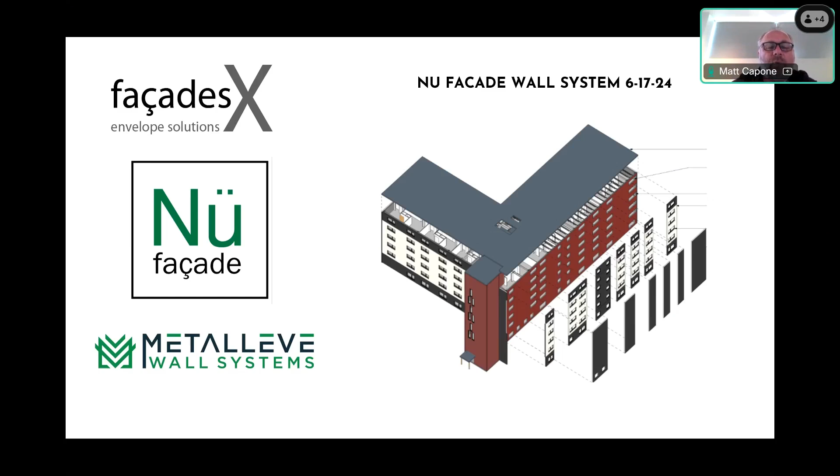My name is Matt Capone, the owner of facadesX Envelope Solutions. Quick presentation today on our Nü facade wall panel system. We're looking to explore the world of renovations and overclad, and in partnership with Metalleve Wall Systems, we've created this kit of parts.

facadesX is my company. And at its heart, we are manufacturers representatives for cladding and wall system manufacturers from around the world. Cladding, fiber cement, windows, wall systems, air vapor barriers, and all kinds of components that really go into the wall. And it's this kit of parts that really helped us create the new facade.

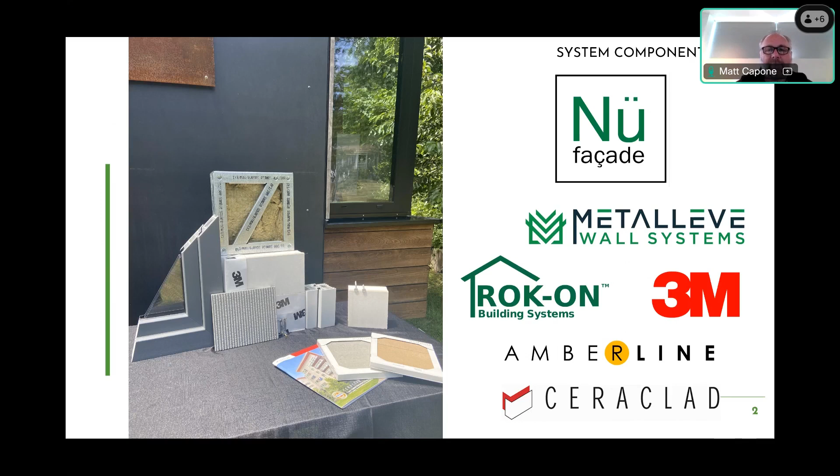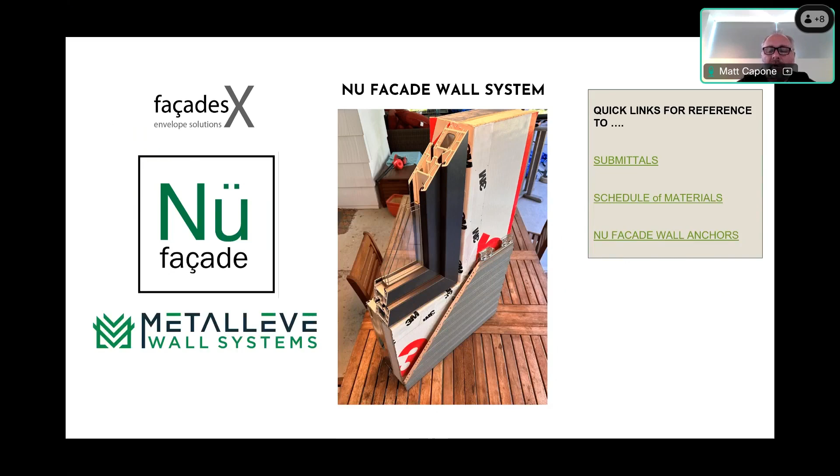So we look at each of the materials as an element, and we create a compound, which is the Nü facade wall panel. So everything is existing as a separate system or product, but then comes together in a panel. And the backbone for that is our partner called Metalleve Wall Systems. Here you see a small cutaway section of a mock-up where we're integrating light gauge metal framing, structural insulated sheathing, cladding, and windows to create panels that can be overclad on top of existing facades.

So here we'll dig into the base, the backbone, the exoskeleton, if you will, of the panel system. Metalleve Wall Systems, we are a manufacturer of steel stud framed walls and floors and trusses, but basically we're buying raw materials. We're buying light gauge metal frame coils, commodity basis, and our system relies on a backbone called FrameCAD.

FrameCAD actually creates these machines and the software for architectural design, for structural design, and all detailing. So all of our modeling is fed into a Revit-based platform that FrameCAD offers, and then we design, we engineer, and then we output to these machines to actually print or create individual pieces.

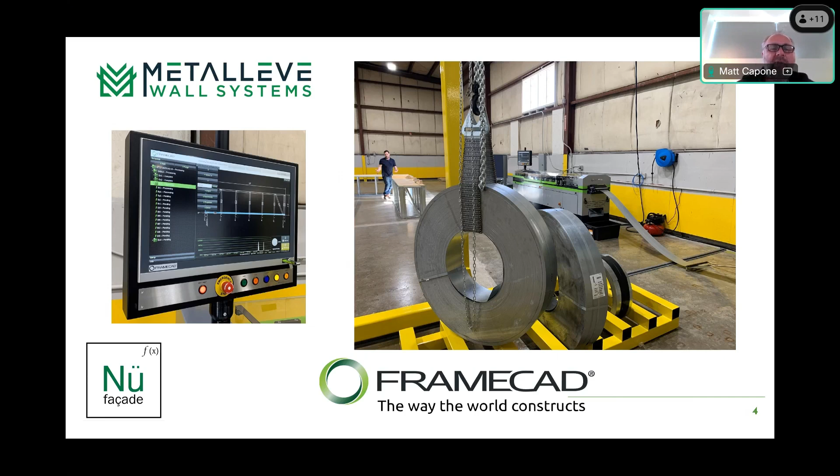So here on the left, you can see the machine: the coil comes in, feeds into the machine, and the output of the machine is C-shaped stud pieces that are already cut, drilled, punched, labeled. They have service holes, they're pre-drilled, they're completely ready for an IKEA type assembly. Every piece of panel is exact and perfect.

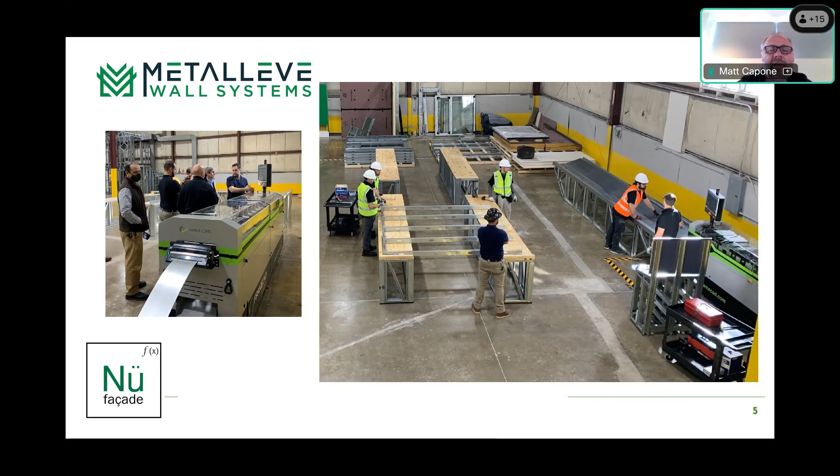So we actually fabricate wall panels that are 3 and 5/8 metal studs and 6-inch in various gauges from 16 gauge all the way up to 20 and 22 gauge. The various gauges are really about structural performance, integrity, ability to be load bearing, and capacity to hold

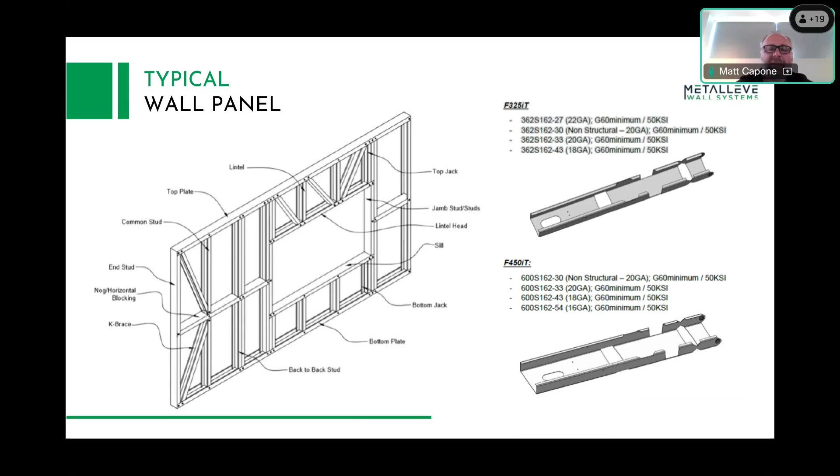themselves in place. A very important element of the FrameCAD backbone that we rely on is that it is an ICC tested assembly. And the ICC is the ultimate testing protocol for performance of materials in the building market, so having this behind us is really important. Also, our independent factory at Metalleve is part of the audit process tied to the prefabrication capabilities that you get with the FrameCAD system. So it's very important that we have that support and protection.

So once we have that steel stud backbone, we're adding some important layers. Here we're seeing pallets of structural insulated sheathing. This is a system called ROK-ON that we utilize.

And this product will screw fasten directly to the steel studs. This replaces the DensGlass for any non-combustible type fire-rated construction, provides an insulation layer, but is also the vehicle that the cladding attaches to. So when we're putting cladding on these walls, we don't need to attach the cladding back to the studs.

The front face of these panels, which are made of magnesium oxide board, are very fire resistant, but they're also very strong for screw pull out. So if you see in the front of this image, you can see a couple screws on the side of the panels. Those are pre-set up for window returns.

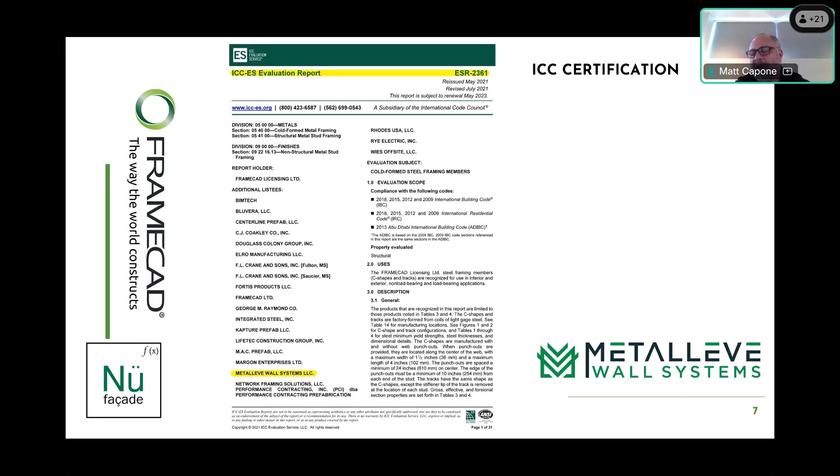So essentially we're creating the steel studs from a shop drawing, a precision fabrication drawing. That same drawing is going to the ROK-ON factory, and they're pre-cutting and pre-manufacturing the sheets that are going to be applied to our panels. And so if we start with a steel stud wall, we then have to overlay this essentially to match or as per the specs require.

So Metalleve is a factory. We are a fabricator of the raw materials to be used on site. And so we're actually serving the Northeast out of our factory in Harvard, Mass. So we have capabilities and logistics for shipping.

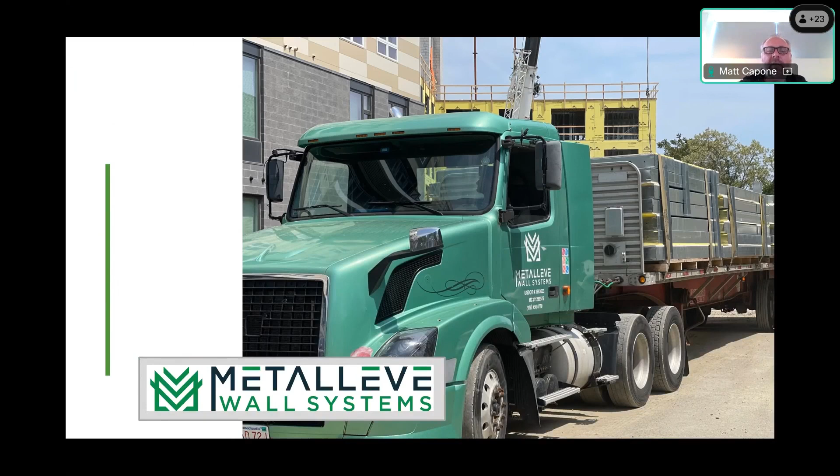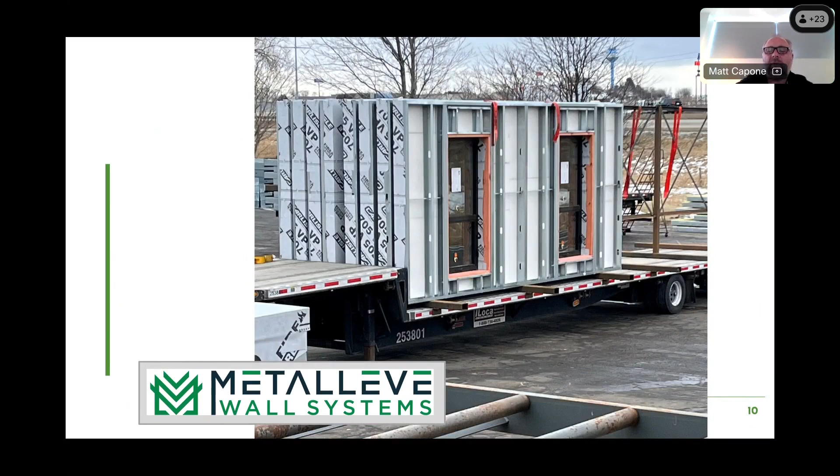In this project, this is a 7-story load-bearing project with steel studs and DensGlass pre-applied. This is a project that is already with windows and having the sheathing and the air vapor barrier applied. And so this is where we're heading for our crop of retrofits that we're going to detail coming up here. But the process here is really pretty straightforward to create these panels and to create them to fit on a specific project.

So I want to highlight this project. This is a current job up in Salem, Massachusetts. This is kind of your typical affordable housing project built mid-60s. This one is 6 stories, 7 stories on the other side. So a lot of these brick housing projects, they're all rented, they're occupied. Tenants must stay in them.

But you think about the number of buildings like this from 3 to 5 to 7 stories around the Northeast and around the country that really need not only some way of repositioning or improving the aesthetic, but also to essentially encapsulate and create a new energy performing, high performance skin that is being put over.

And so the first step that we do on site is actually to do a 3D scan to understand the layout and the panel configurations. How much does the building lean? What can we learn about that existing structure that might be unique or create difficulties? So we start from this and an architect's drawings. Maybe we have the existing drawings to create a panel layout. What is efficient? What's effective?

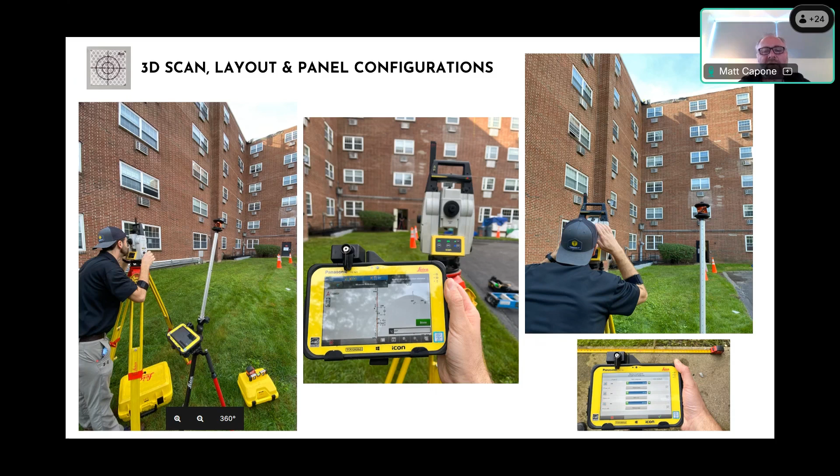And we have to think about items like logistics for hoisting and rigging and building access. Is a bigger panel better? Is a smaller panel better? Lots of things play into this.

One of the requirements of this project was that they're going to run all of the new fresh air and new condensate lines in this service cavity. So these will be field applied and installed before our panels come. So the task was not only to create a panel, but the task was to create an offset in that cavity of 6 inches. So in the blue layer, you can actually see those are the steel studs, and then we have the structural sheathing and the cladding.

But through the process of playing with dimensions, window sizes, what is the exact, let's say, recipe that's right for this building, right for every building, lining up the windows. There's a lot in that process that really is very important to understand and basically to nail as much as possible before we arrive on site.

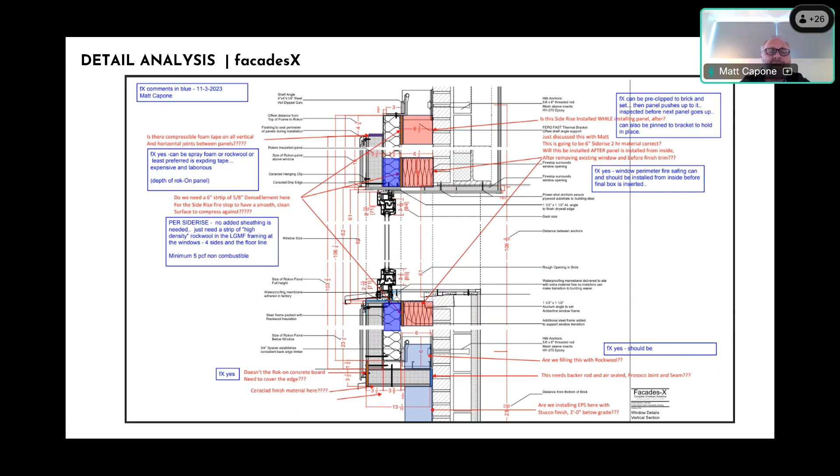They list the weights, all the dimensions, so the architect can confirm. We can confirm window rough openings. And again, this goes to the structural sheathing manufacturer, and this becomes really the basis that we start to design on and figure out our tolerances in and out of the building.

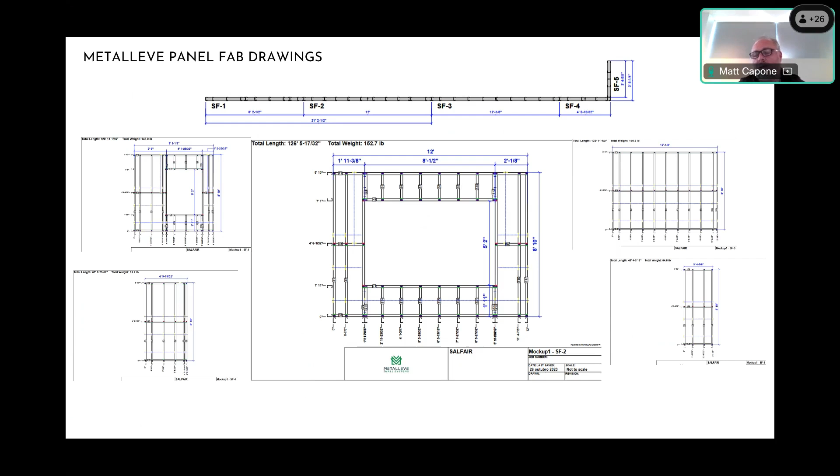And this allows the owner to understand the complete goal of the project, what we're trying to do, but also for the general contractors, for the subcontractors, for all the people involved to really understand what are the complexities, what are some things that are simple, and how do we find clash detection? How do we understand where things may or may not be in the way and create issues?

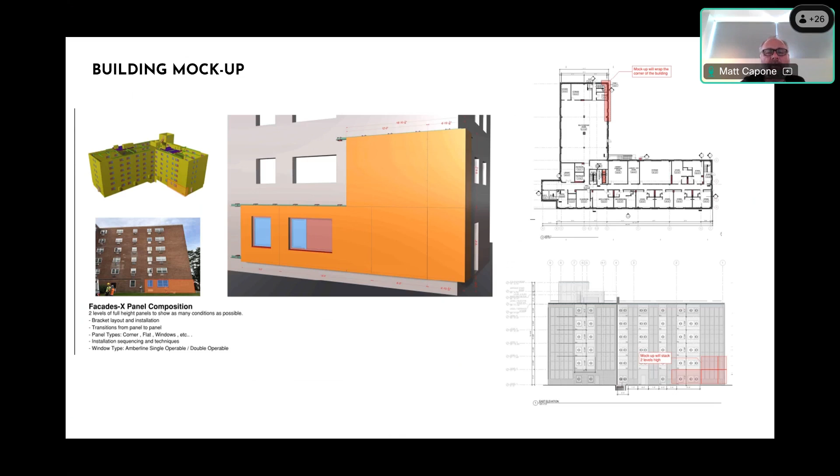Specifically, one of the items is about a brick facade and how you attach to a brick facade. This building is not unique, but it is a bit different than many others. So some walls are multiple widths of load-bearing bricks. This building's actually a single veneer, actually tied to a steel structure back to the building.

And then red and white is the vapor permeable barrier. The black here you see is actually the seaming, so seam tape. So since each panel is applied independently, there's a bit of a gap. So that's a pre-planned gap. On this job, I believe it's 3/8 of an inch. And so in between each panel, we're packing insulation in between, some silicone, and then we're field applying a membrane to create the connections between the panels.

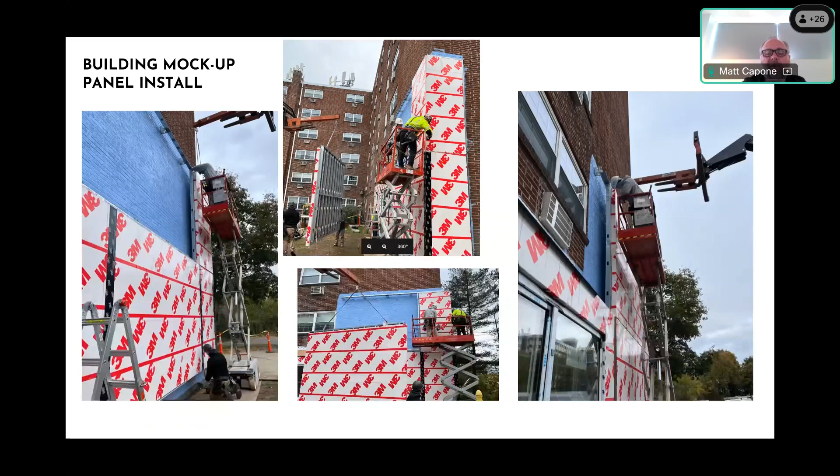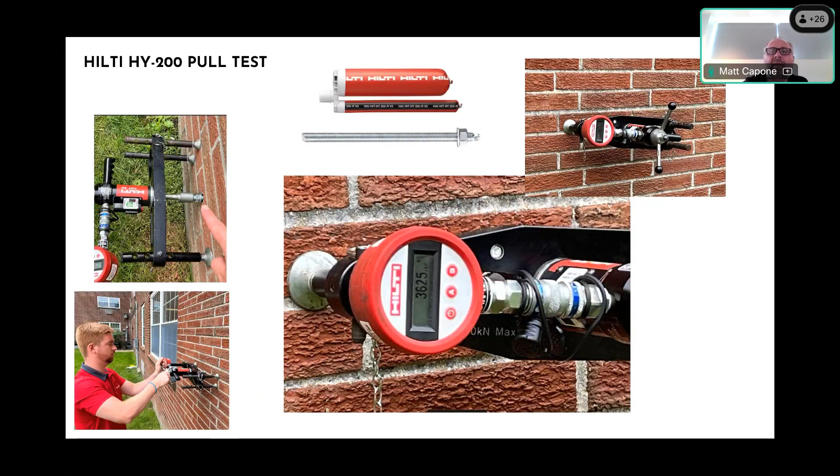How can we support? Where do we support? What is the value of the bricks, the pull tests? What do they connect back to? This is a very important thing that really does vary on a lot of projects.

So important. So along with the panel, a key component here is not just to put the panel in front of the wall, but also to understand how we're creating these cavities that we discussed, right? So we're creating this space. The building code looks at this space as a fire potential, right?

So NFPA 285 is a fire code, a fire standard that is helping to protect commercial buildings or buildings over 40 feet. And so part of the requirement is not only to have a complete fireproof layer or primary layer, but also at openings, at panel joints, floor lines, and openings, we're actually required to compartmentalize. And so one of our partners here is a world leader in basically fireproofing and isolation for compartments.

And if you can imagine, there's essentially a plywood or MDO, MDF box that goes from the interior drywall finish and mates up to the inside of the new window. So we're creating a deeper window cavity, actually creating pretty nice shelf area for tenants to use.